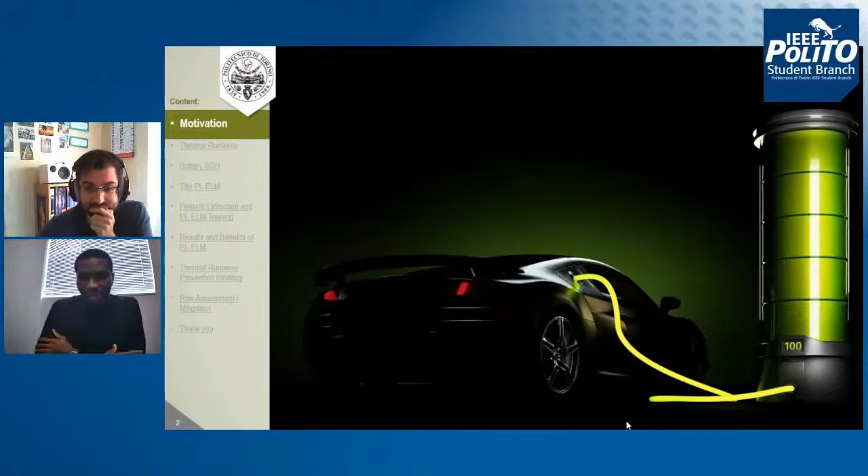Sorry for the interruption. So let's start by giving some motivation why we're having this discussion. In recent years, the EU has been very strategic in policy implementations to reach the goal of climate neutrality by 2050, as proposed by the EU and other major stakeholders. The idea is to continuously replace the billions of existing internal combustion engine vehicles, which contribute to about 87% of global petroleum consumption and about 33% of global energy. Replacing these will have a great impact in reaching that goal.

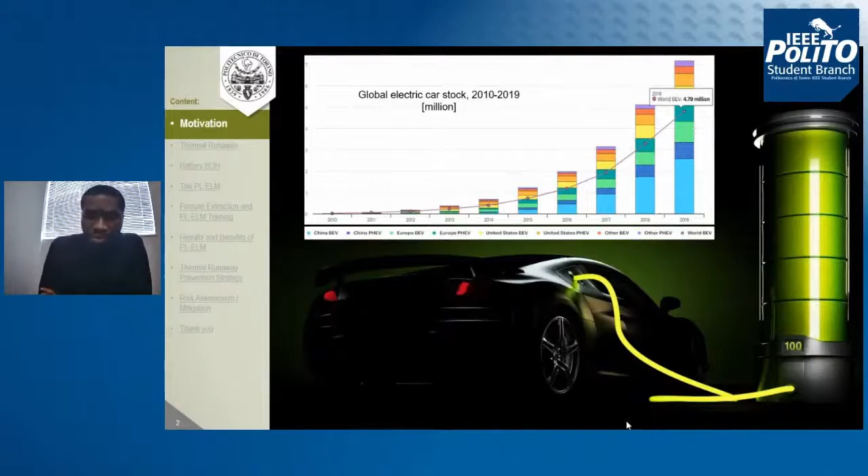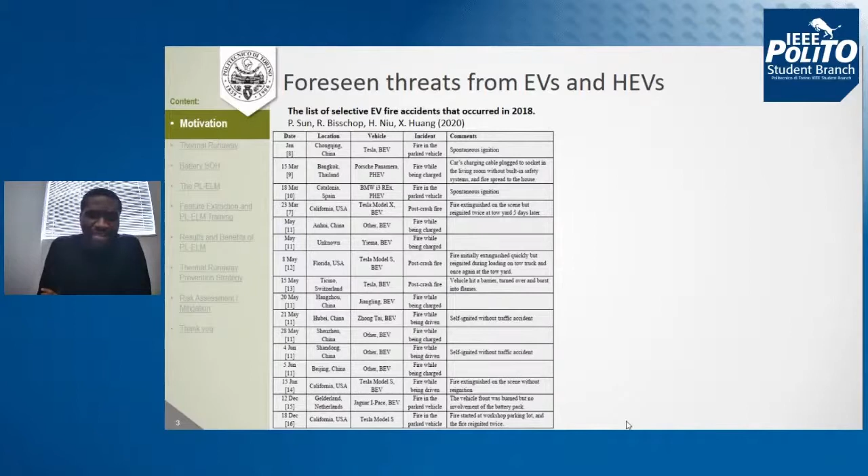Interestingly, the sales of electric vehicles from 2010 to 2019, as can be seen here, have been quite promising, and this reinforces the hope of reaching that goal. The truth is that no mission is successful without stories of failures and pain points, and this isn't going to be an exception. Just in 2018, more than 16 fire incidents associated with electric and hybrid vehicles were recorded. This scene is quite unpleasant. We don't want this. But sadly, this threat will continue to grow with increasing demand for electric and hybrid vehicles, and as the need to increase the energy and power density of the cells grows.

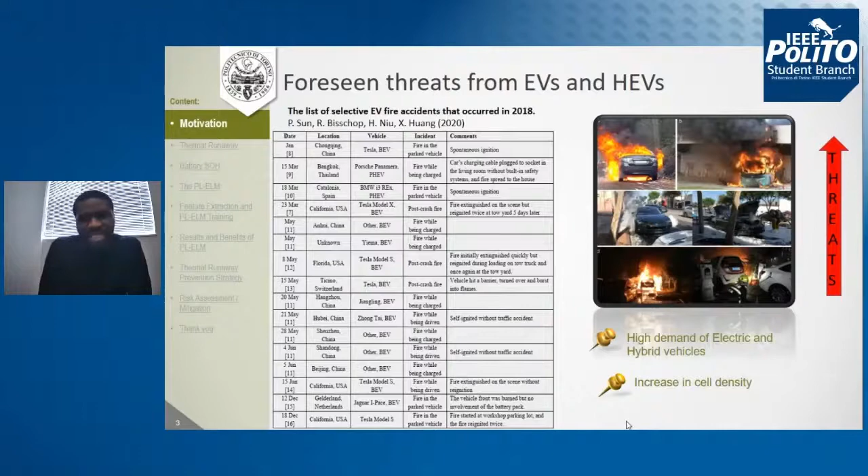What is the problem? The root cause of these fire incidents is the phenomenon known as thermal runaway. Normally, the battery is designed to work within a state of charge between 20% and 80%. Outside this zone, uncontrolled use of the battery is very unsafe because of the rapid change in voltage. Also, the temperature of the battery increases with the current requested from the cells, as can be seen in this plot, with 7C being the highest current and 1C the lowest current applied.

There are high peak currents associated with electric and hybrid vehicles. These high peak currents, cumulatively with the conditions under which the battery is operated, drive the cell to a third level degradation of the battery. At this point, thermal runaway is inevitable, and usually the battery is set on fire.

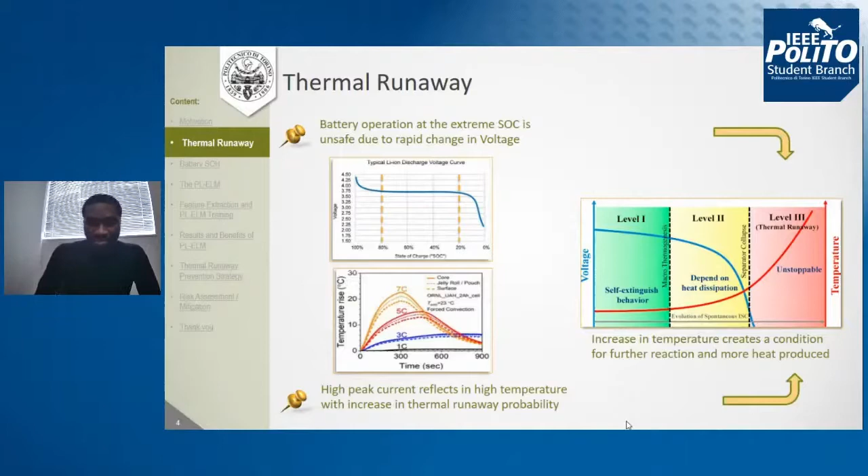In every cell, you figure out that usually with aging of the battery, the inactive area tends to grow. This inactive area has to be monitored properly if you really want to know the actual state of charge of the battery. Because if it's not known, you have fake information about the state of charge. Remember that you want to ensure that the battery is operated within the required zone of 20% to 80% state of charge. So accurate state of health estimation is very crucial for this.

That's not all. The second problem is that the aging characteristics of cells that have the same specification vary. It's not the same, even if they are subjected to the same load condition. This is simply because currently the chemical industry is not able to guarantee determinism in the chemical processes, especially in the lithium-ion cells.

Now let's talk about the feature extractions. As you know, the features are the inputs of the PL-ELM structure, and they are used for the training of the model. We have the privilege to have our data collection from the Prognostics Center of Excellence at NASA, and we use these data sets to train our model.

The features are extracted by discrete variations of the state of charge, the voltage, and that of the energy. These features are captured within a buffer of 90 seconds. Of course, it's variable, but we have chosen 90 seconds time length of buffer for the best computation.

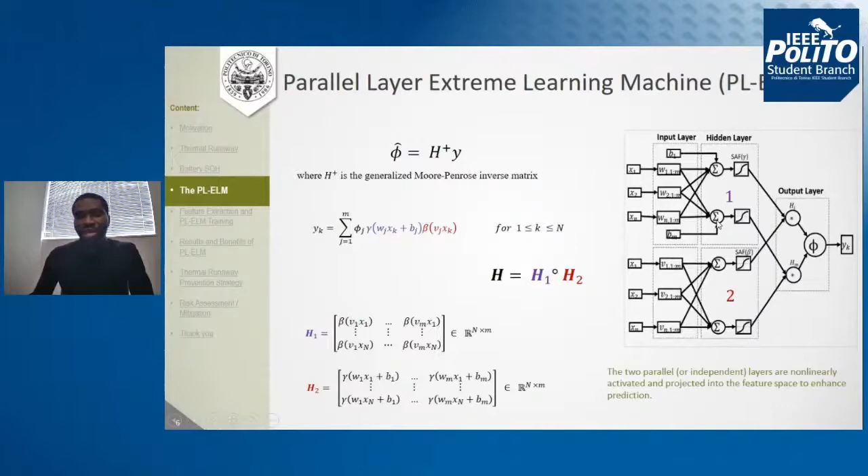Then again, I forgot to mention that the structure of this algorithm is selected by varying the number of neurons. By varying the number, you can choose the more reliable, the more accurate model as you desire. So you can see from here, the 2C, that the model reached the stability at around 10. But we used only 12 neurons for designing our model.

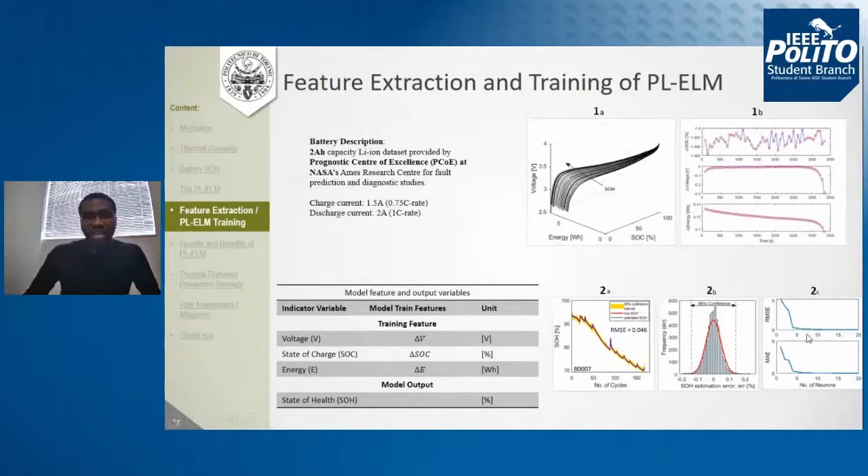Now, in the prediction, since we have our model ready, the next is for us to use the model to predict the state of health on other batteries. So we used only one battery, which is battery number 7, to train the model. And now we use other batteries, the battery number 5, 6, and 18, to validate our model.

And as it can be seen here, the model has shown to be very, very adaptable to the whole dynamics and predict the state of health very accurately for the rest of the batteries. And here we can see that the root mean square value is quite nice. I think the maximum there is 0.473. And you can see the error bound is quite little too. For the worst case scenario, we have between -0.62 to 1.31.

Then a bit of comparison with just a single layer feed-forward neural network, which is the ELM, as I discussed earlier. You can see that this ELM doesn't have as much capability in adapting to the changes in the state of health, and that gives us a lot of errors in prediction. Watch the figure number B there, and you figure out that the error bound is quite large, from -3.18 to 4.82, and the root mean square value of 1.563.

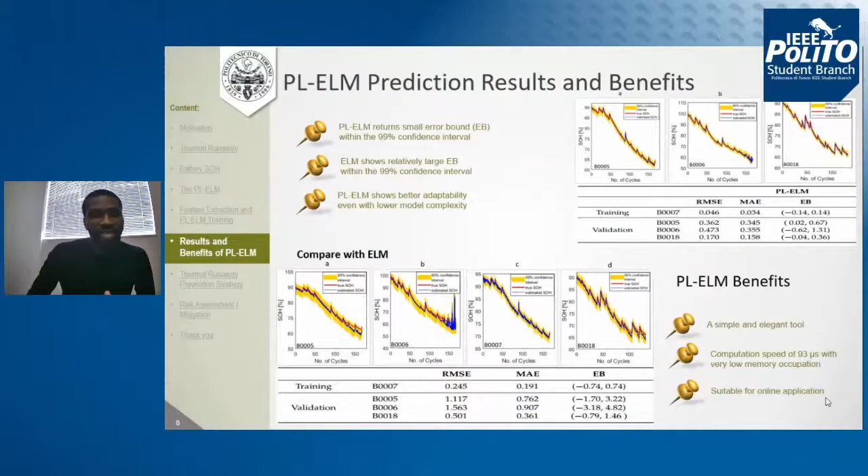So some benefits of this PL-ELM: it's quite simple, because apparently what we do is just a least square to obtain the output matrix. Quite simple, and very, very fast, very computationally efficient. At the end, when the model is trained, of course, also very fast. We can predict state of health in just 93 microseconds. That's super nice, and that's why it's very suitable for online application, considering also the minimum space that it takes in the memory. Let's move on.

So without letting you get lost in so much of the details, I would want to summarize this work with a bigger picture so that we can understand what we want to achieve here. The goal is for us to measure state of charge accurately.

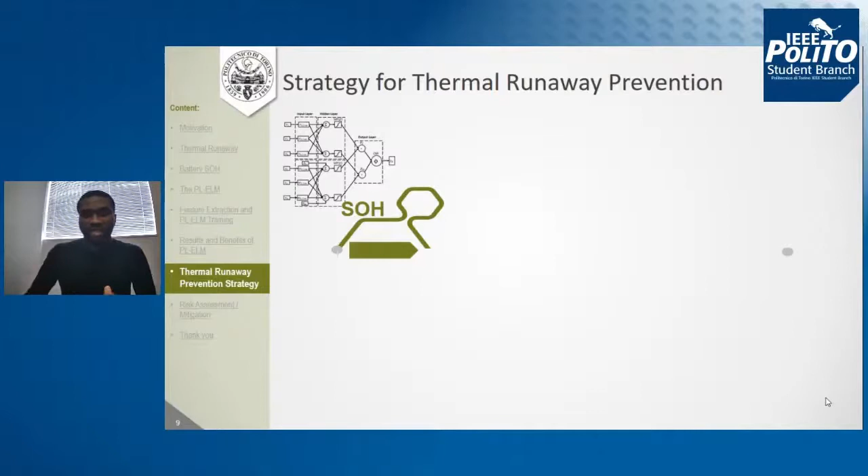And for us to do that, we will apply the model we have discussed in this work to predict state of health, even for different cells that exist. When we are able to predict the state of health, we use it to correct the state of charge. And if we can correct the state of charge and get the precise state of charge, we also need information about the thermal condition of the battery.

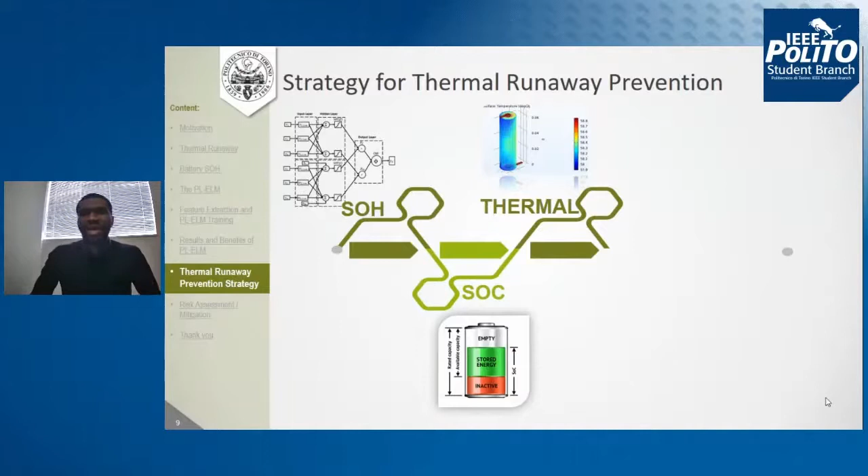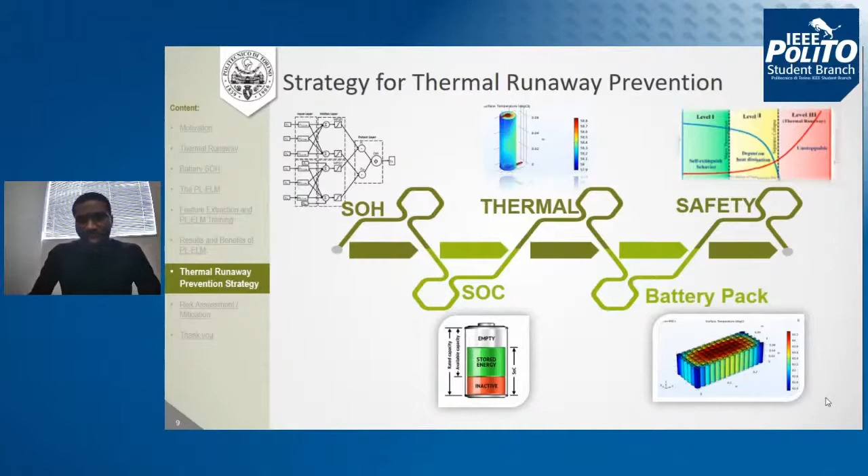We use other algorithms that we developed also in the lab to predict the state of the temperature of the battery. And when these two algorithms are put together, they are all coupled into the BMS, the battery management system. And with that, you can guarantee a safe operation of the entire battery pack. And this is what we want to achieve.

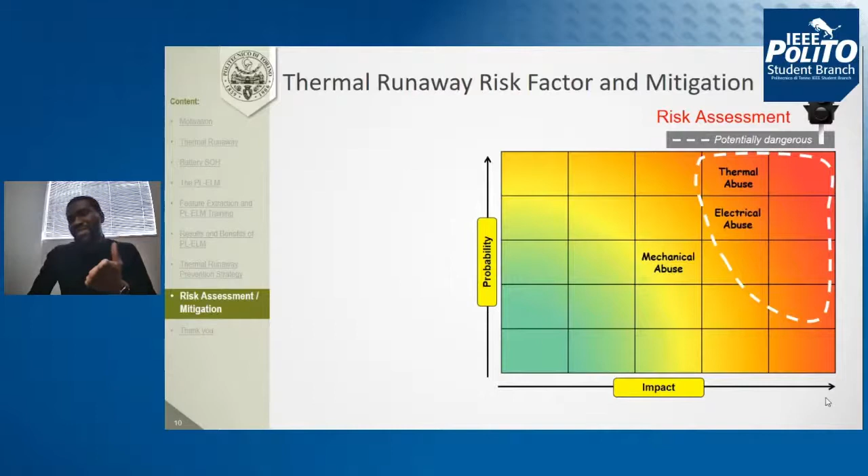Without using this model, we have a very high risk, potentially dangerous situation, because you can see that the risk impact of the thermal abuse and the electric abuse is so high. And this is more reason why we have thermal runaway. But by controlling these appropriately, by accurately measuring the state of health and using it to correct the state of charge, we can move the electrical abuse from the dangerous state to a relatively safe zone.

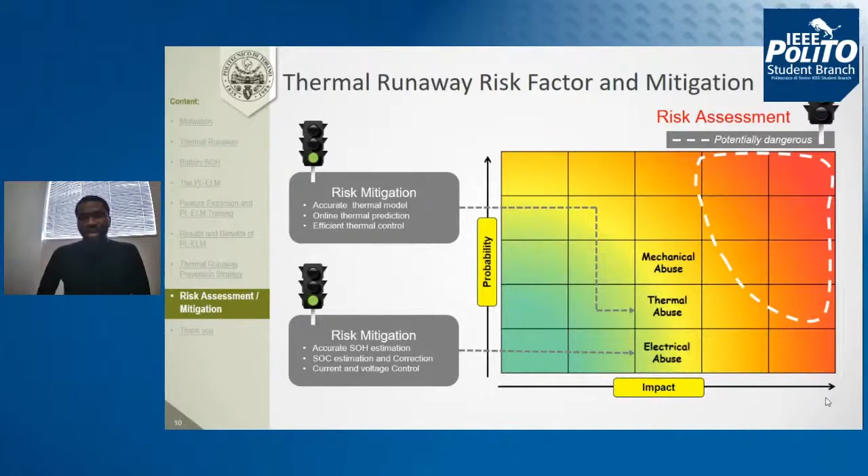The same also applies for the thermal abuse. And when we do this, we can enhance the safety in the use of our electric and hybrid vehicles, and also achieve the goals of the EU and other major stakeholders of reaching climate neutrality by 2050. These are some of the works that we have published that may be relevant for you. You can search for them, download them and read them for more details.

Yeah, they told me that working on batteries is quite boring. I hope I didn't bore you, but really it saves lives. So that's why we're doing it. Thank you very much for your attention. Thank you.

Thank you, Ethelbert. I guess it requires a lot of work to give a reliable estimation, and even if we don't perceive it in our daily life, I guess any electronic and electric power device now needs this kind of work. So thanks a lot. Thank you. We have a few questions. Let's see.

Apart from state of health, what are the other parameters which can be a good measure for the health of a battery? Okay, for the what? Alternatives? Apart from the state of health, as you described it, are there any other parameters that can be relevant metrics to characterize the health of the battery? Yes. Actually, there are different metrics that exist for measuring battery aging. Some people just use capacity, of course. There are a couple of them in the literature, but the most pervasive, I would say, is the state of health. I don't know if it has been properly adopted, but most people use it.